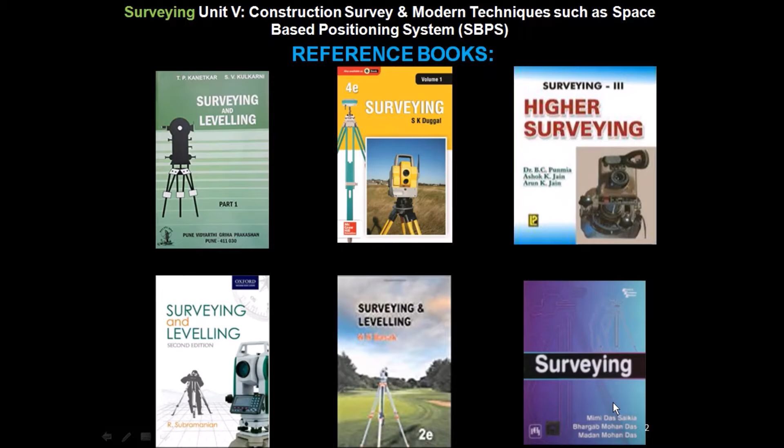Now we will see the course outcome. On successful completion of this course, the student will be able to define and explain basics of plane surveying and differentiate the instruments used for it.

Second course outcome: express proficiency in handling surveying equipment and analyze the surveying data from these equipment.

Third course outcome: describe different methods of surveying and find relative positions of points on the surface of the earth.

Fourth course outcome: execute curve setting for civil engineering projects such as roads, railways, etc.

Fifth course outcome: articulate advancements in surveying such as space-based positioning systems.

Sixth course outcome: differentiate map and aerial photographs, and also interpret aerial photographs.

Now we will see the course objectives. With successful completion of the course, the student should have the capability to describe the function of surveying in civil engineering construction. Second course objective: identify the sources of measurement errors and mistakes, and understand the difference between accuracy and precision as it relates to distance, differential leveling and angular measurements.

Third course objective: identify and calculate the errors in measurement and develop corrected values for differential level circuits, horizontal distances and angles for open or closed loop traverse.

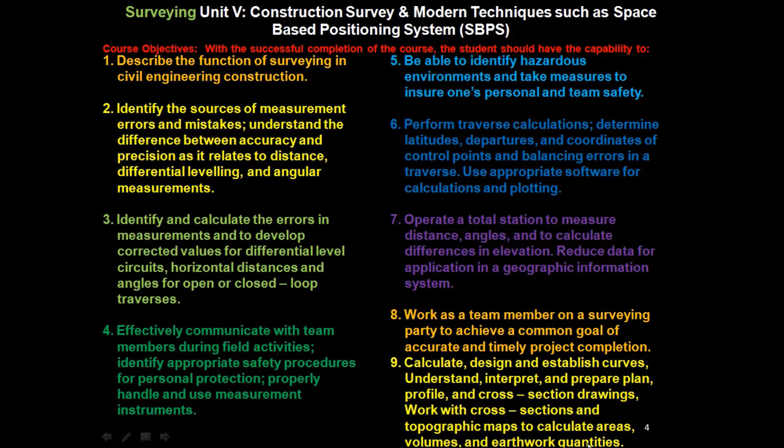Now we will see the syllabus of Unit 5. The title is Construction Survey and Modern Techniques such as Space-Based Positioning System, SBPS, which includes Part A: Introduction to Construction Survey, Establishing of Horizontal and Vertical Controls, Setting out of buildings, Maintaining verticality of tall buildings, Survey for open traverse.

Roadway, railway, drainage lines, water lines, canals, setting out of a bridge, determination of the length of the central line and the location of piers, setting out of a tunnel, surface setting out and transferring the alignment underground.

Part B includes introduction to SBPS, SBPS systems - GPS, GLONASS, Galileo, GAGAN, BeiDou and their features, segments of SBPS that is space, control and users, and applications of SBPS in surveying.

Now we will see Part A: Introduction to Construction Survey, Establishing of Horizontal and Vertical Controls, Setting out of Buildings, Maintaining Verticality of Tall Buildings, Survey for Open Traverse, Roadway, Railways, Drainage Line, Water Lines, Canals.

Setting out of a Bridge, Determination of the length of the central line and the location of piers, Setting out of a tunnel, surface setting out and transferring the alignment underground. Now we will see Part A, Introduction to Construction Survey.

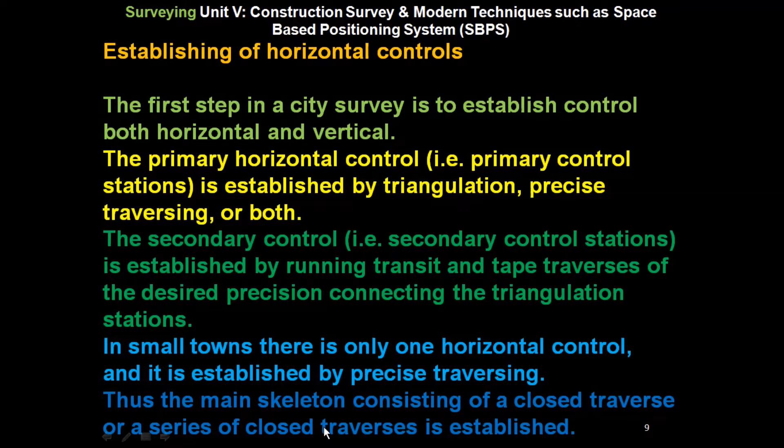Now we will see the establishing of horizontal controls. From the sides of these traverses, the details such as outlines of streets, gullies, buildings, etc. are located. In the triangulation for a city survey, the sides are necessarily shorter in length.

Objects such as church spires, flag poles, top of the hills, chimney, high buildings, water tank, etc. are generally used as triangulation stations in order to form well-shaped triangles and to avoid building high towers as far as possible, to reduce the cost of the survey.

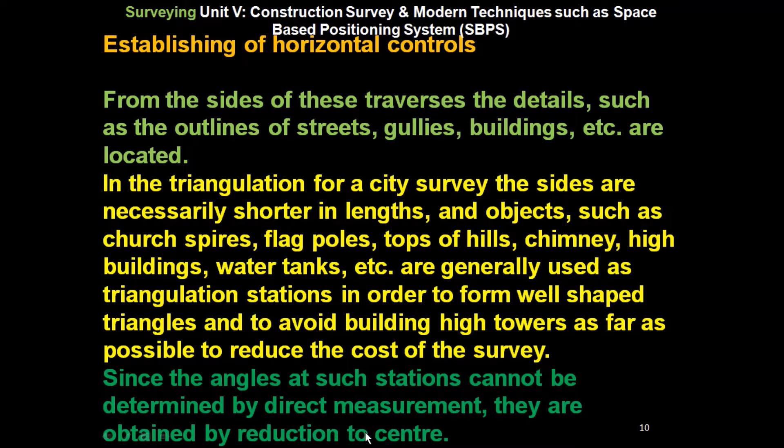Since the angles at such stations cannot be determined by direct measurement, they are obtained by reduction to center.

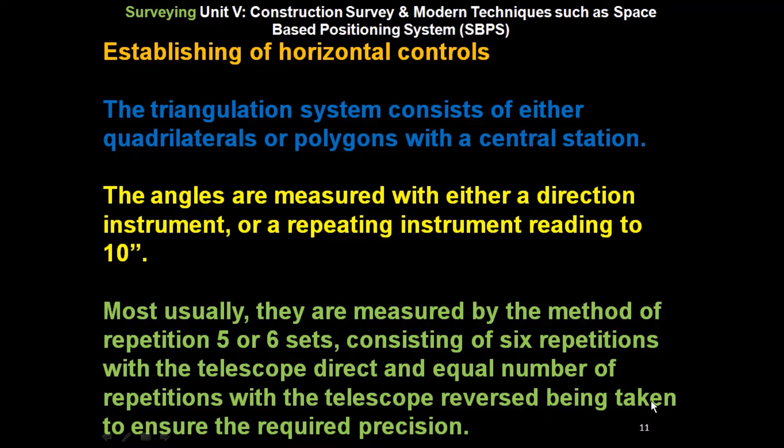The triangulation system consists of either quadrilaterals or polygons with a central station. The angles are measured with either a direction instrument or a repeating instrument reading to 10 seconds. Most usually they are measured by the method of repetition, 5 or 6 sets consisting of 6 repetitions with the telescope direct and an equal number of repetitions with the telescope reverse, to ensure the required precision.

Because of the shorter lengths of the sides of triangles, the signal should be exactly centered over the station marks. Astronomical observations for azimuths should be made at 2 or more stations.

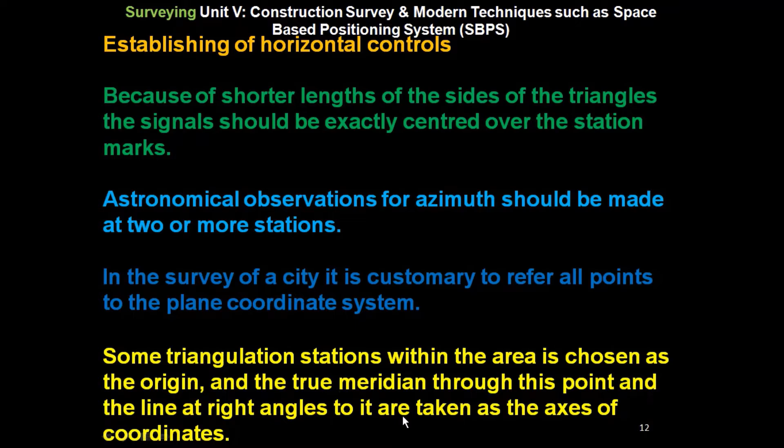In the survey of a city, it is customary to refer all points to a plane coordinate system. Some triangulation station within the area is chosen as the origin, and the true meridian through this point, and the line at right angles to it, are taken as the axes of coordinates. All reference points are plotted by means of plane rectangular coordinates with reference to these axes.

The azimuths of the initial line and some intermediate lines should be determined by astronomical observation. The advantage of the coordinate system is that in case a point of known coordinates is lost, it may be readily and precisely replaced by means of the coordinates of the other points.

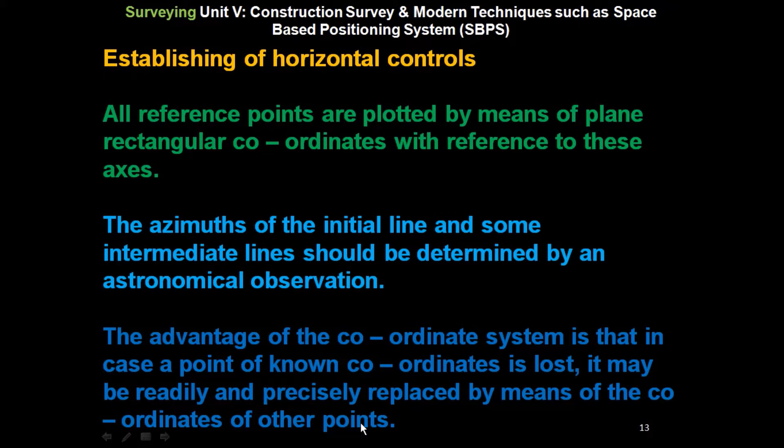The entire triangulation system is adjusted by the method of least squares. The precision required in triangulation is that the average error of closure of a triangle should not exceed 1.5 seconds, and the maximum one should not exceed 5 seconds.

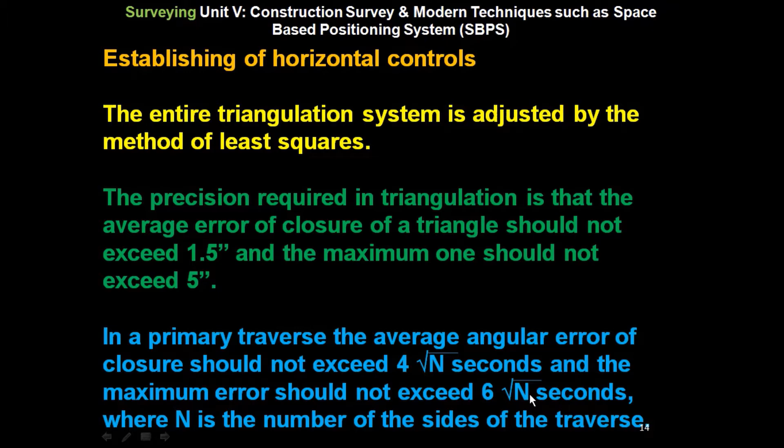In a primary traverse, the average angular error of closure should not exceed 4 under root n seconds, and the maximum error should not exceed 6 under root n seconds, where n is the number of sides of the traverse. In a secondary traverse, the corresponding figures are 10 under root n seconds and 15 under root n seconds.

The maximum error of closure in a primary traverse should not exceed 1 in 20,000 for large size city work. In a secondary traverse, it should not exceed 1 in 10,000 for medium size city work, while in a tertiary traverse it should not exceed 1 in 5,000 for small town work.

Now we will see the establishing of vertical controls. The next step is to establish vertical control. The purpose of vertical control is to establish benchmarks at convenient intervals all over the area.

The first order benchmarks are established by precise leveling at about half a kilometer or so apart, on permanent objects such as walls of buildings, abutments, piers, parapet walls of bridges, etc., by running levels in closed circuits, the permissible error of closure being 4 under root k millimeter, where k is the length of the closed circuit in kilometers.

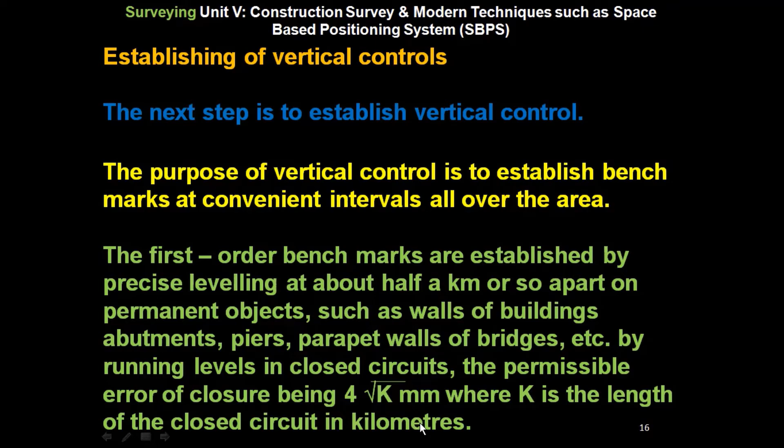The entire level net, consisting of several closed circuits, is adjusted by the method of least squares to determine the most probable values of the elevations of the benchmarks.

Additional benchmarks are established at traverse stations and also on permanent objects such as curb stones, gate pillars, fire hydrants, plinths and walls of buildings, etc.

This is done by running a line of second order levels beginning from any first order benchmark and closing on some other first order benchmark, or beginning from and ending on such a benchmark, the maximum closing error being 8 under root k millimeter, where k is the length of the line in kilometers.

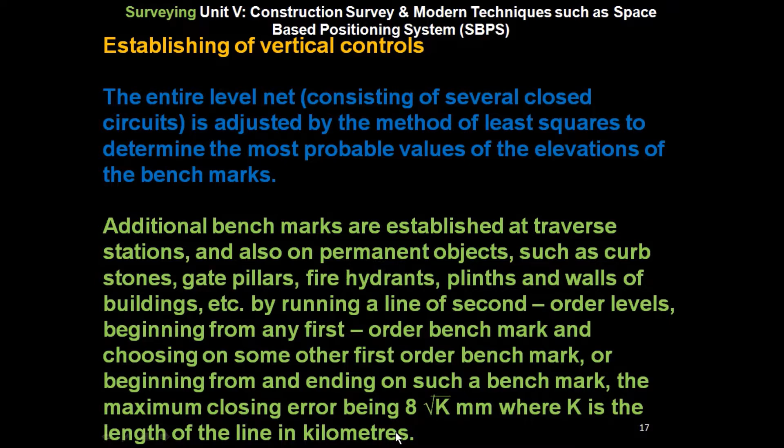So we have seen the establishing of horizontal and vertical controls. Now we will see the setting out of buildings.

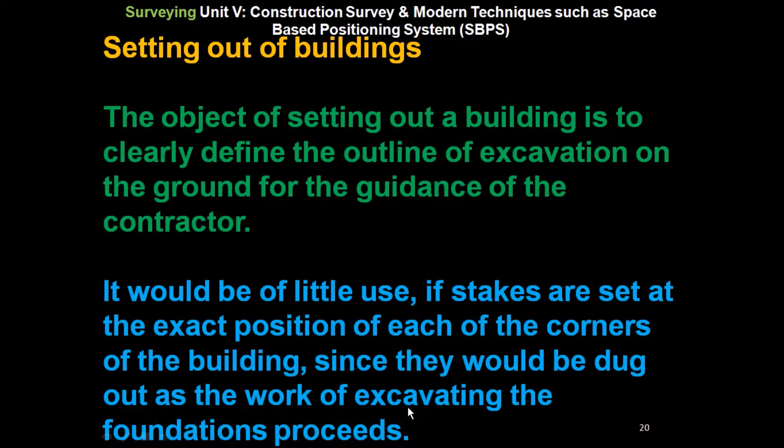The object of setting out a building is to clearly define the outline of excavation on the ground for the guidance of the contractor. It would be of little use if stakes are set at the exact position of each of the corners of the building, since they would be dug out as the work of excavating the foundations proceeds.

The best method is therefore to set out a reference rectangle outside the limits of excavation, say about 5 meters from the building line as shown in figure 1, so that the reference pegs A, B, C and D will not be disturbed during excavation, and then to locate each corner by means of coordinates with reference to the sides of this rectangle.

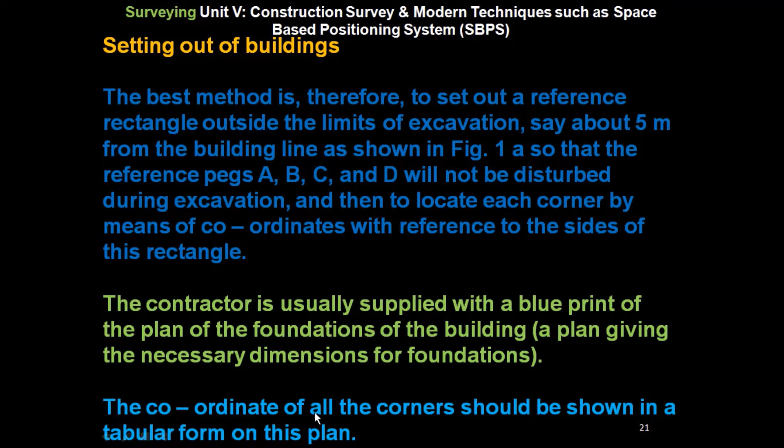The contractor is usually supplied with a blueprint of the plan of the foundations of the building, a plan giving the necessary dimensions for the foundations. The coordinates of all the corners should be shown in a tabular form on this plan.

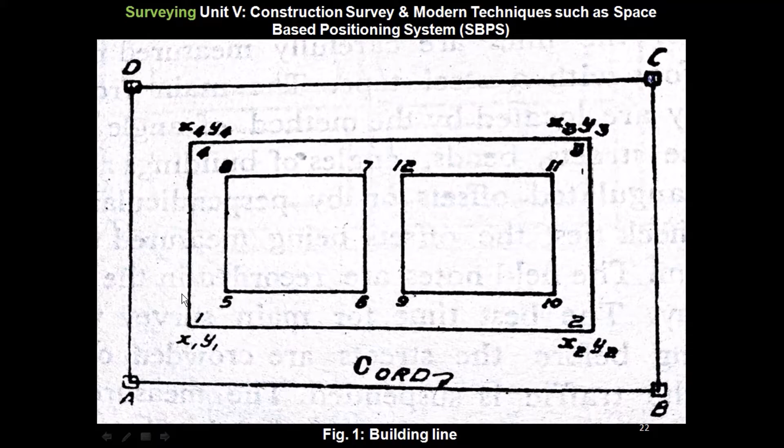So here we can see figure 1 showing the building line. So this is the building line.

The equipment required for the work consists of: first, a 30 meter steel tape; two 15 meter metallic tapes; third, the hammer; fourth, the plumb bob.

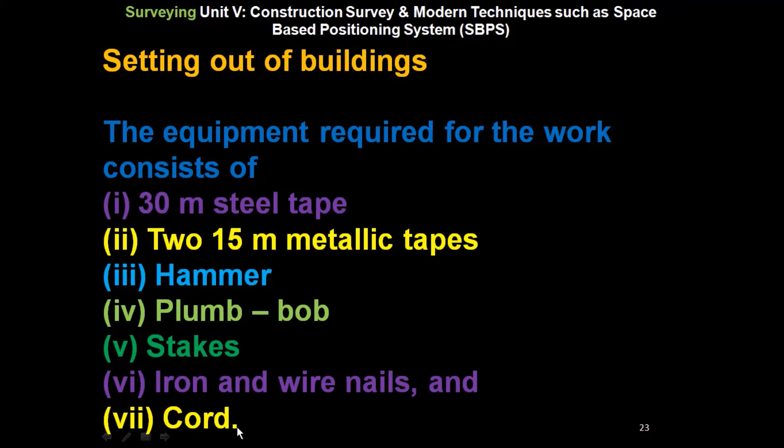Fifth is the stakes, sixth is the iron and wire nails, and seventh is the cord. So we will see the procedure for setting out a building.

Two stakes A and B are accurately driven at the required distance apart, say 14.5 meters. A cord is then stretched, the ends being secured to the wire nails driven in the center of the stakes. At A is set out a line perpendicular to AB, the right angle being set out with the tape.

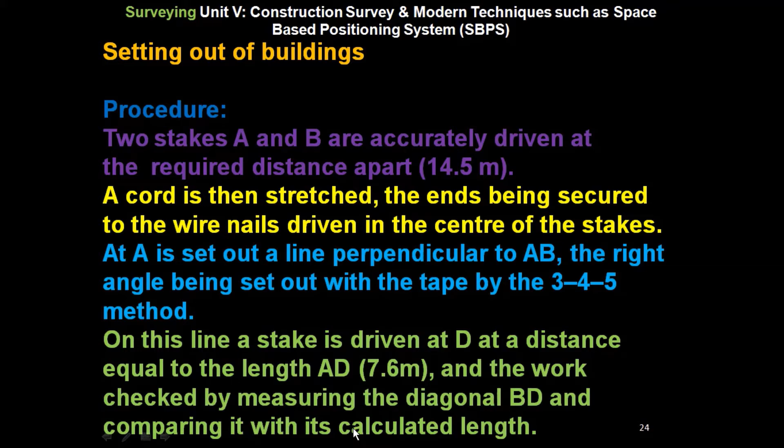By the 3-4-5 method, on this line a stake is driven at D at a distance equal to the length AD, say 7.6 meters, and the work is checked by measuring the diagonal BD and comparing it with its calculated length. The error, if any, should be corrected.

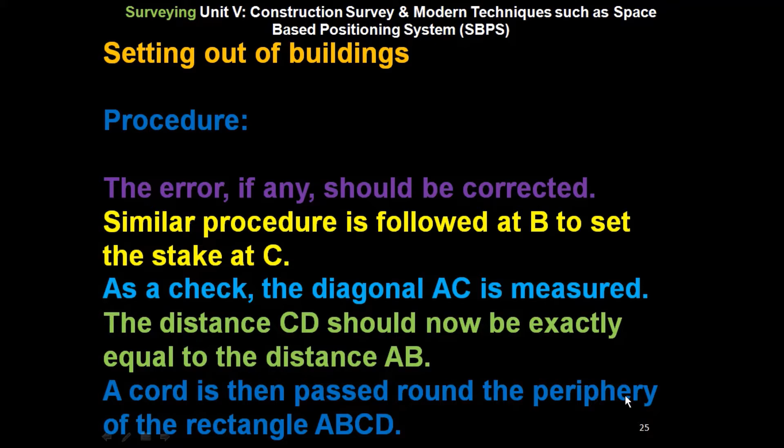A similar procedure is followed at B to set the stake at C. As a check, the diagonal AC is measured. The distance CD should now be exactly equal to the distance AB. A cord is then passed round the periphery of the rectangle ABCD.

Having set out the reference rectangle, each corner is fixed by measuring its coordinates from the sides of the reference rectangle. For example, corner 1 is fixed by measuring its coordinates x1 and y1 from AB and AD, and a stake is then driven in to mark its exact position.

When all the corners have been staked, a cord should be passed around the periphery of the figures 1, 2, 3, 4, 5, 6, 7, 8, etc., and the outline of the foundations marked with lime spread along these lines outside the cord. Now we will see the alternate method for setting out of a building.

In this method, instead of circumscribing a rectangle, the rectangle formed by the center lines of the outside walls of the building, as shown in figure 2, is set out accurately with the tape as a reference rectangle, and the corners are located by measuring their coordinates with reference to the sides of this rectangle.

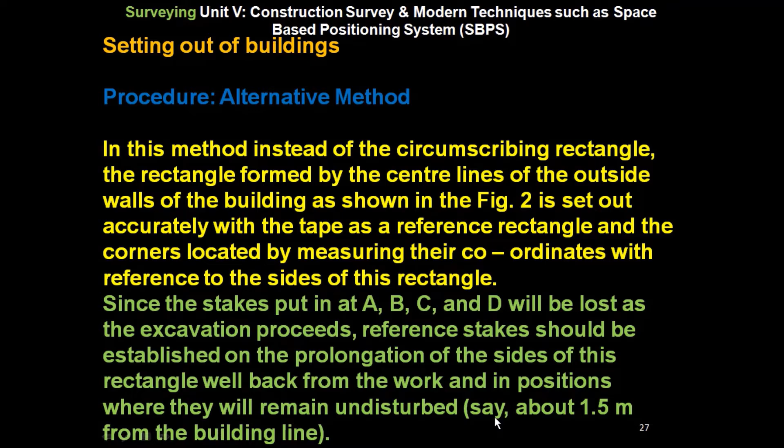Since the stakes put in at A, B, C and D will be lost as the excavation proceeds, reference stakes should be established on the prolongation of the sides of this rectangle, well back from the work and in positions where they will remain undisturbed, say about 1.5 meters from the building line. They should be protected by standing a drain pipe over each of them.

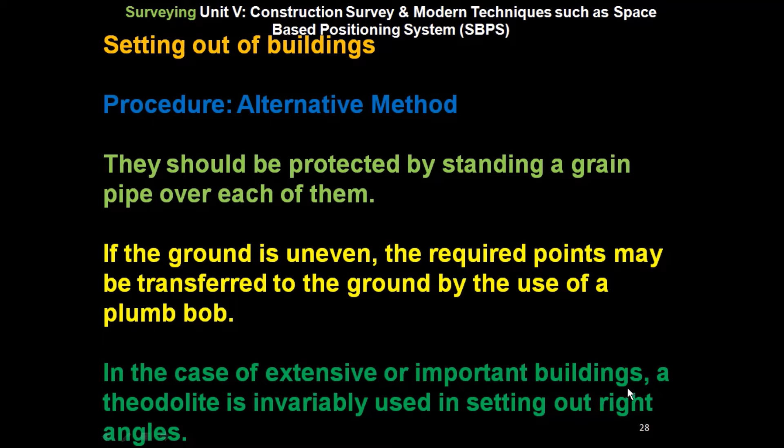If the ground is uneven, the required points may be transferred to the ground by the use of a plumb bob. In the case of extensive or important buildings, a theodolite is invariably used in setting out right angles.

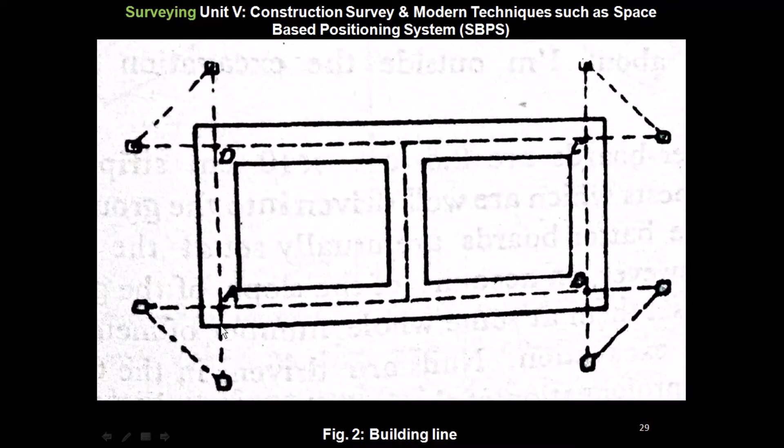So here we can see figure 2 showing the building line. So this is the building line.

Now we will see another method, the batter board method, for setting out of a building. In English practice, the batter board method is used. Temporary stakes are accurately set at all corners of the building, the entire work being checked by measuring the diagonals.

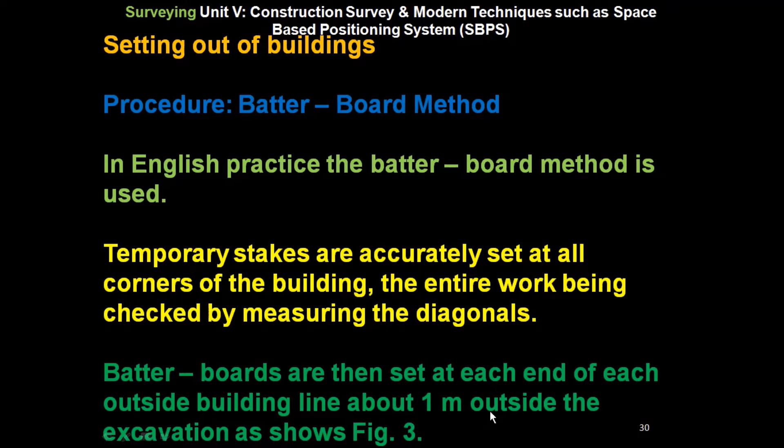The batter boards are 2.5 cm by 10 cm strips nailed to 5 cm by 10 cm posts which are well driven into the ground. The top edges of all the batter boards are usually set at the same level.

Sometimes, however, on account of the slope of the ground, it is convenient to set them at some whole number of meters above the bottom of the excavation.

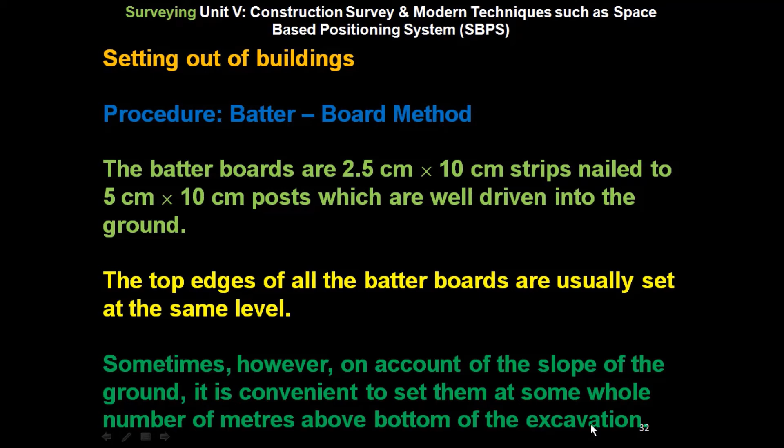Nails are driven into the top of these boards on the prolongation of the building lines, which are given by the theodolite. The building lines are defined by stretching a cord or wire between the nails in opposite batter boards.

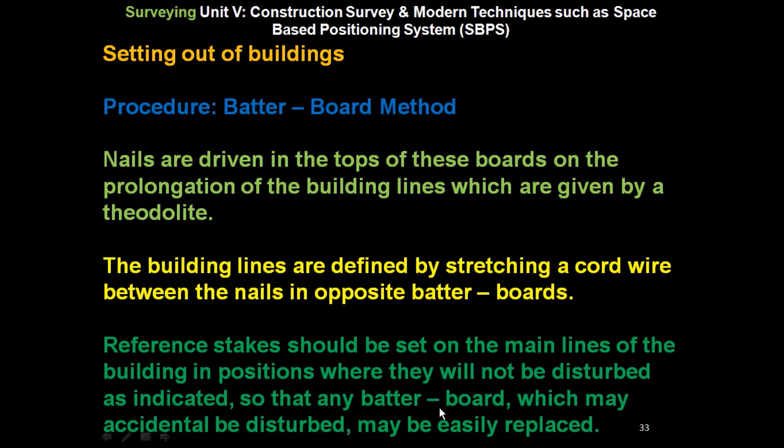Reference stakes should be set on the main line of the building in positions where they will not be disturbed, as indicated, so that any batter board which may accidentally be disturbed may be easily replaced.

Benchmarks should be established in convenient positions around the site of the work. They should be well away from the site so that they may remain undisturbed until the work is completed.

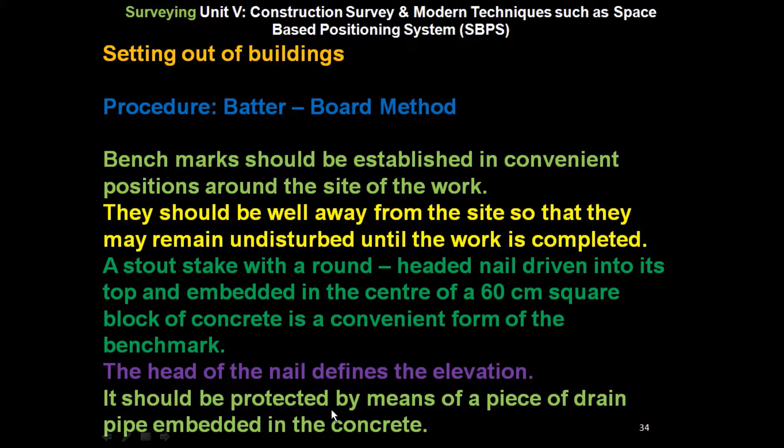A stout stake with a round-headed nail driven into its top and embedded in the center of a 60 cm square block of concrete is a convenient form of benchmark. The head of the nail defines the elevation. It should be protected by means of a piece of drain pipe embedded in the concrete.

So we have seen the setting out of buildings. Now we will see the maintaining of verticality of tall buildings. So, maintaining verticality of tall buildings.

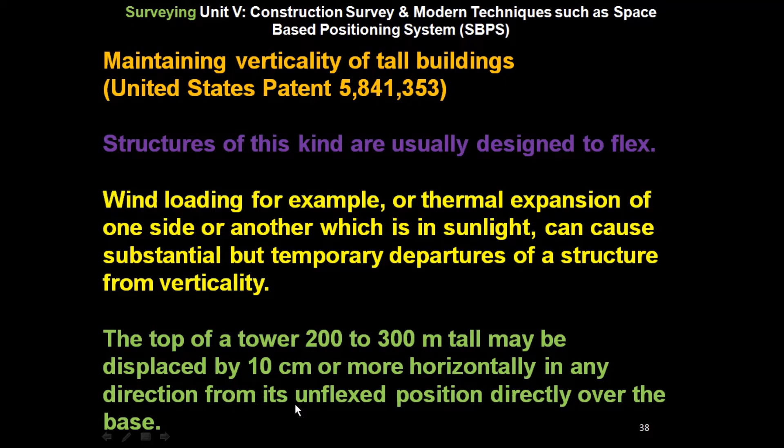The top of the tower, 200 meters to 300 meters tall, may be displaced by 10 centimeters or more horizontally in any direction from its unflexed position directly over the base.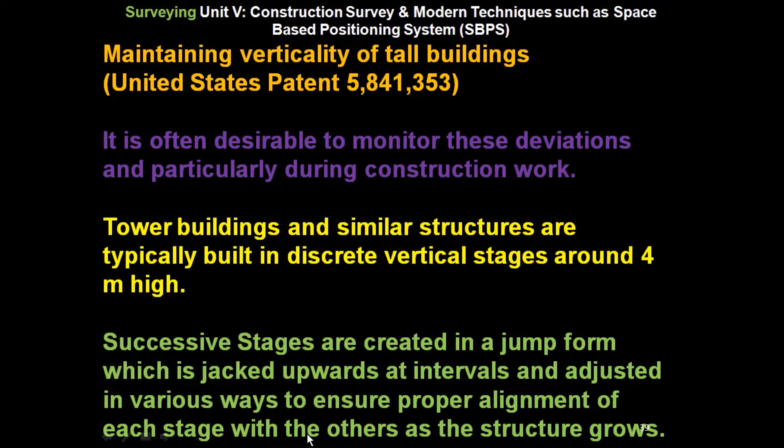It is often desirable to monitor these deviations, particularly during construction work. Tower buildings and similar structures are typically built in discrete vertical stages around 4 meters high. Successive stages are created in a jump form which is jacked upwards at intervals and adjusted in various ways to

ensure proper alignment of each stage with the others as the structure grows. The jump form contains formwork or shuttering into which concrete is poured when a new stage is created, and which must be set up in line with concrete already poured in the previous stage. The formwork must often be fixed in place at an appreciable angle from vertical, depending on the current state of flex or tilt in the existing structure.

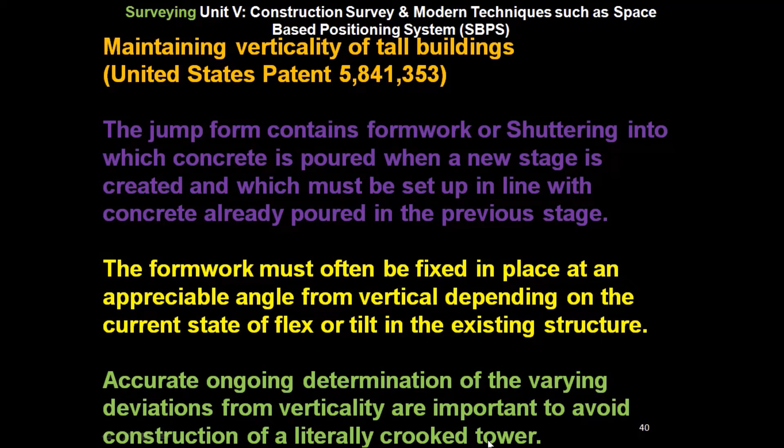Accurate ongoing determination of the varying deviations from verticality is important to avoid construction of a literally crooked tower. The proper functioning of some services to be installed within the tower walls, and in some cases structural strength of the tower itself, may otherwise be adversely affected.

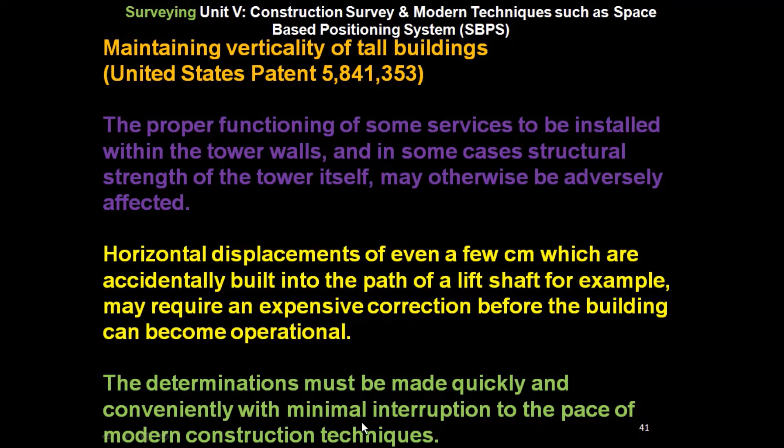Horizontal displacement of even a few centimeters which is accidentally built into the path of a lift shaft, for example, may require an expensive correction before the building can become operational. The determinations must be made quickly and conveniently with minimal interruptions to the pace of modern construction techniques.

Traditional methods of monitoring the verticality of a building under construction involve use of a zenith optical plummet or an optical theodolite. Both of these devices require trained personnel to carry out measurements under appropriate conditions and have an accuracy which decreases with height of the building.

At least one surveyor must visit the building site each time the structure of a new level is being laid out, and the conditions may not be particularly suitable for a measurement at that time. These methods are therefore not regarded as being particularly convenient or accurate for use in the construction of tall towers.

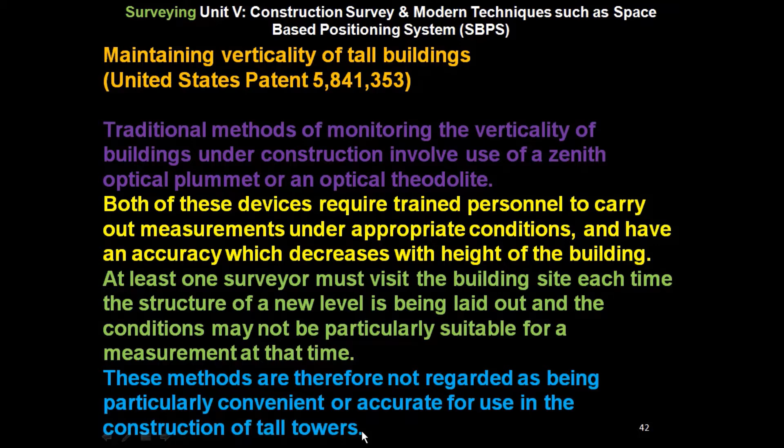In the first method, the zenith optical plummet is located at ground level over a fixed mark and a laser beam is directed upward to a bull's eye at the new level. Locating the deviations of the beam on the bull's eye indicates whether the building is rising sufficiently close to vertical.

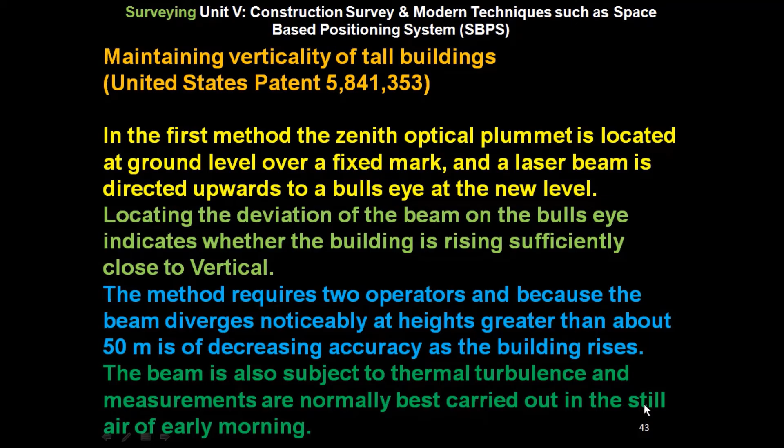The method requires two operators, and because the beam diverges noticeably at heights greater than about 50 meters, it is of decreasing accuracy as the building rises. The beam is also subjected to thermal turbulence, and measurements are normally best carried out in the still air of early morning. In the second traditional method, the theodolite is located some distance from the structure and a telescope sighting is made of the ground level mark and then the bull's eye.

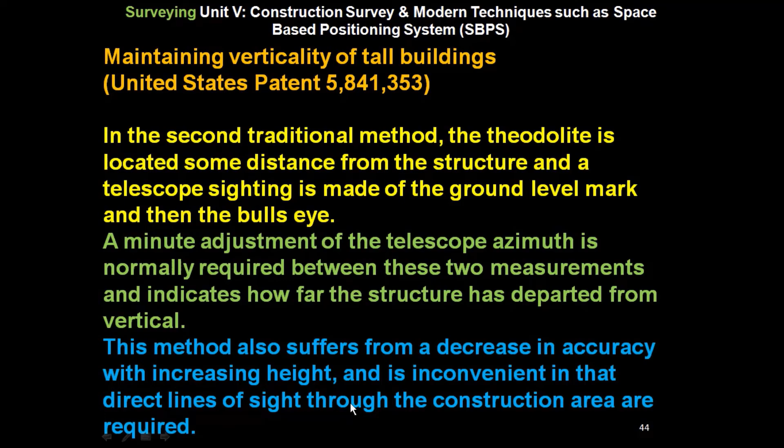A minute adjustment of the telescope azimuth is normally required between these two measurements and indicates how far the structure has departed from vertical. This method also suffers from a decrease in accuracy with increasing height and is inconvenient in that direct lines of sight through the construction areas are required.

The modern methods of surveying are able to make use of a remote positioning system, which may be satellite or land based. The satellite system most commonly used today is the Global Positioning System, GPS, although others such as Global Orbiting Navigation Systems, GLONASS, are also in use or under development. Some land-based systems which effectively simulate the satellite-based systems for a small area are also under development.

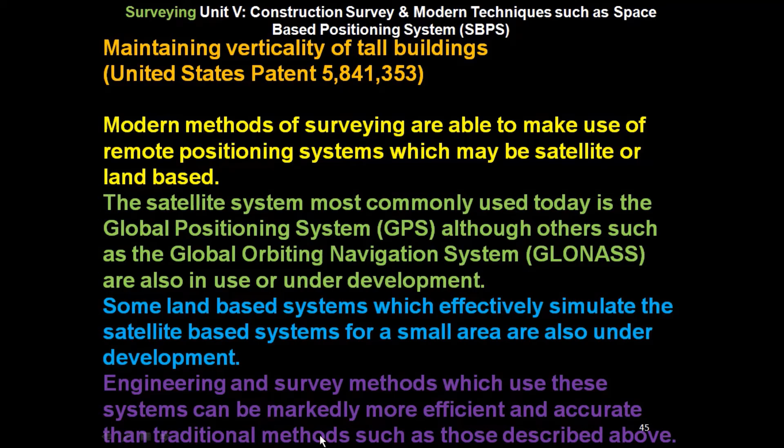Engineering and survey methods which use these systems can be markedly more efficient and accurate than traditional methods such as those described above.

Use of GPS in surveying typically involves a single operator who sets up a base antenna or receiver over the control point having a known position, and moves about with the mobile antenna or receiver, sometimes called a GPS total station. The operator places the antenna over unknown survey points in the field to record their positions using signals transmitted by a minimum number of satellites which are above the horizon.

A vector or baseline is determined from the base site to the mobile unit. Survey points whose positions are measured in this fashion may in turn become control points from which measurements of other unknown points may be taken.

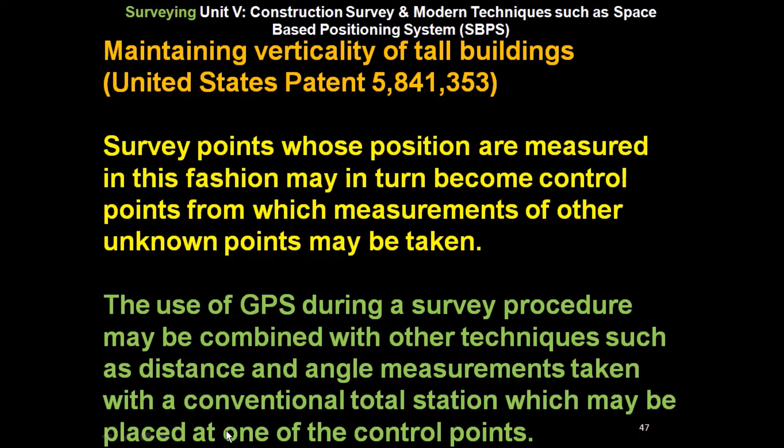The use of GPS during a survey procedure may be combined with other techniques such as distance and angle measurements taken with a conventional total station, which may be placed at one of the control points.

Each GPS satellite transmits two coded L-band carrier signals which enable some compensation for propagation delays through the ionosphere. Each receiver contains an almanac of data on the satellite orbits and uses ephemeris corrections transmitted by the satellites themselves.

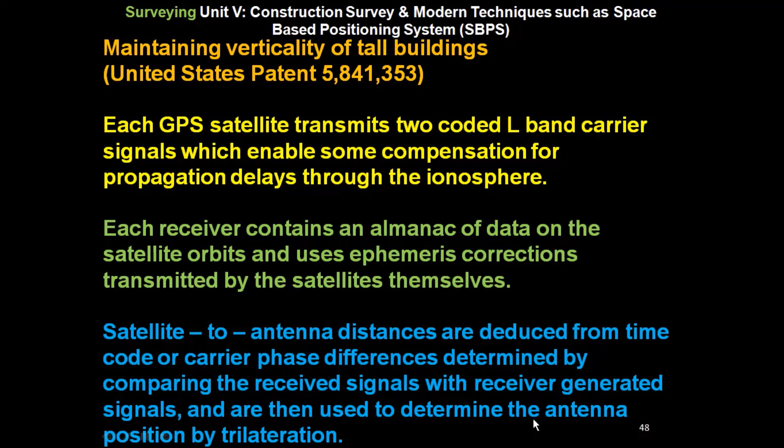Satellite to antenna distances are deduced from time code or carrier phase difference determined by comparing the received signals with receiver-generated signals, and are then used to determine the antenna position by trilateration.

Only those satellites which are sufficiently above the horizon can contribute to a position measurement, the accuracy of which depends on various factors including their geometrical arrangement at the time when the distances are determined. Distances measured from an antenna to four or more satellites enable the antenna position to be calculated with reference to the global ellipsoid WGS84.

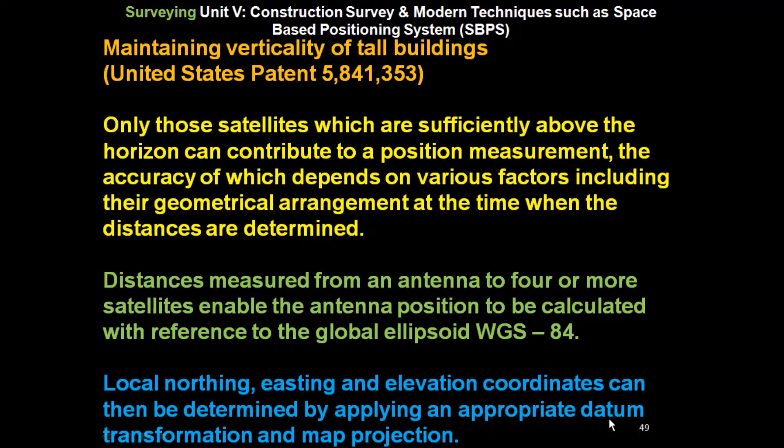Local northing, easting, and elevation coordinates can then be determined by applying an appropriate datum transformation and map projection. By using carrier phase differences in any one of several known base mobile receiver techniques, the mobile antenna coordinate can be determined to an accuracy in the order of 1 centimeter.

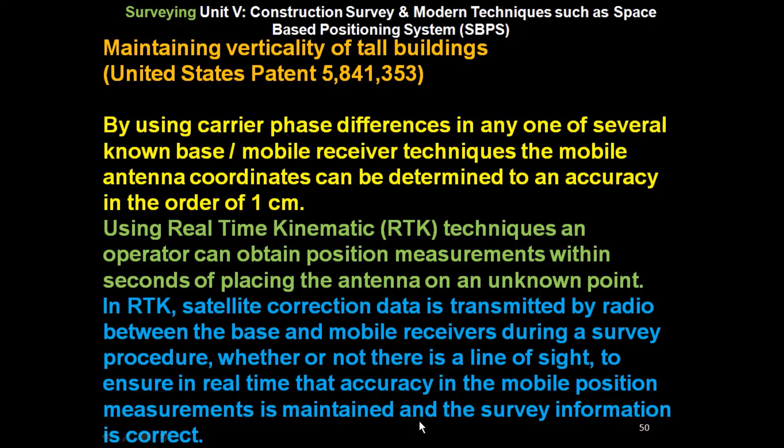Using real-time kinematic (RTK) techniques, an operator can obtain position measurements within seconds of placing the antenna on an unknown point. In RTK, satellite correction data is transmitted by radio between the base and the mobile receivers during a survey procedure, whether or not there is a line of sight, to ensure in real time that accuracy in the mobile position measurements is maintained and the survey information is correct.

Determination of verticality of various structures such as high-rise buildings and towers is enabled through various methods involving use of a series of tilt-meter devices, a remote positioning system, or a combination of both. These methods are particularly useful in monitoring deviations from vertical during construction work and adjusting a jump form.

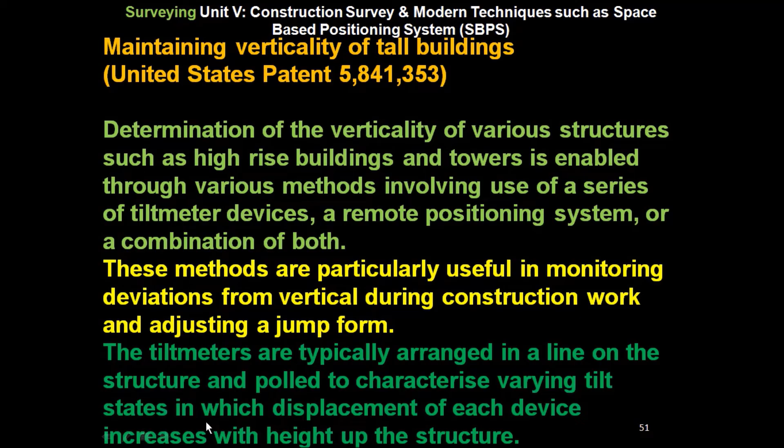The tilt meters are typically arranged in a line on a structure and polled to characterize varying tilt states in which displacement of each device increases with height up the structure. The remote positioning measurements are typically made in real time using a satellite-based system such as GPS, the Global Positioning System.

Departures of a survey point on the jump form from a vertical target line may be used to monitor verticality during the construction process. These methods may be combined with tilt-meter measurements being used to monitor growth of a tower structure and calculate an expected position of the jump form at any stage of construction, and GPS measurements being used to monitor the actual position.

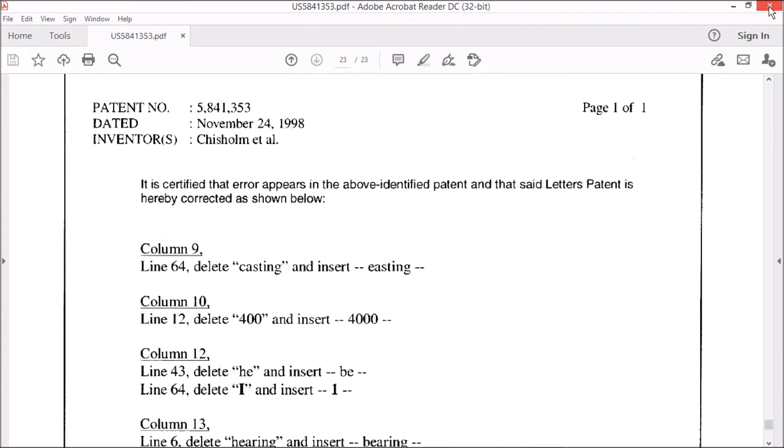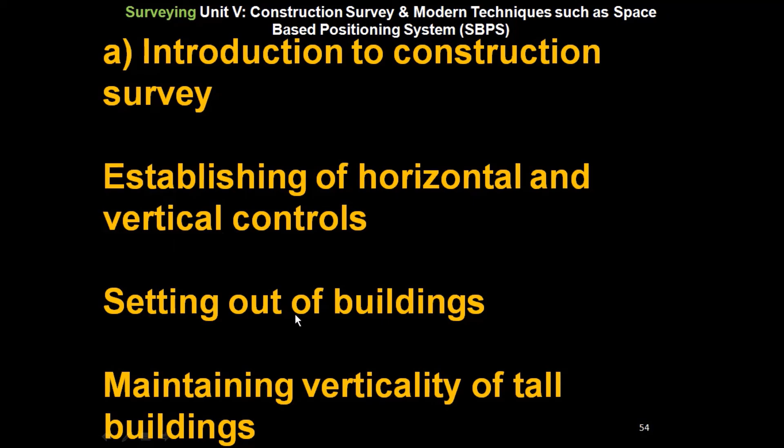So we have seen maintaining verticality of tall buildings. We have seen part A, Introduction to Construction Survey: establishing of horizontal and vertical controls, setting out of buildings, maintaining verticality of tall buildings, survey for open traverse, roadway, railway, drainage line, water lines, canals, setting out of a bridge, determination of the length of the central line and the location of piers, setting out of tunnel, surface setting out and transferring the alignment underground.

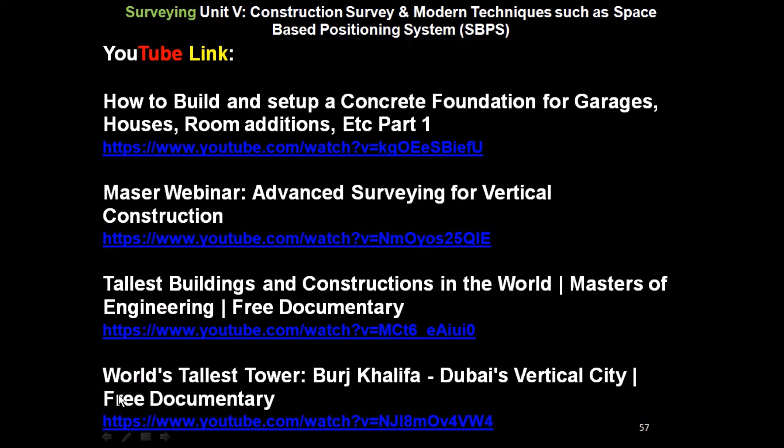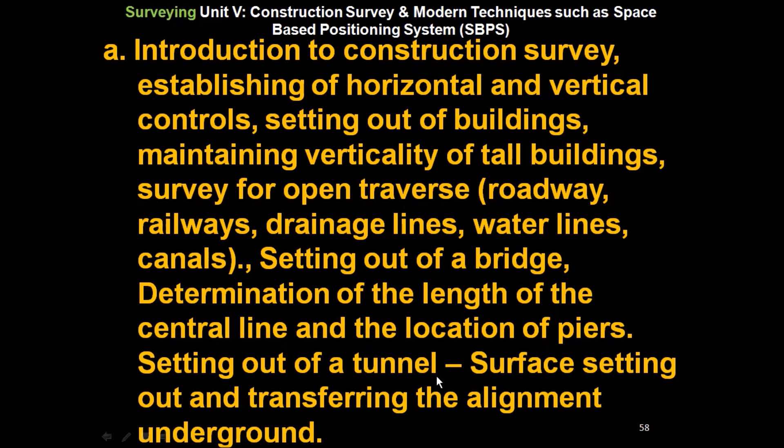So we have seen part A, Introduction to Construction Survey: establishing of horizontal and vertical controls, setting out of buildings, maintaining verticality of tall buildings, survey for open traverse, roads, railways, drainage line, water lines, canals, setting out of a bridge, determination of the length of the central line and the location of piers, setting out of tunnel, surface setting out and transferring the alignment underground. This is the syllabus for unit number 5, titled Construction Survey and Modern Techniques such as Space-Based Positioning System (SBPS).

It also includes part B, which includes introduction to SBPS, SBPS system, GPS, GLONASS, Galileo, Gagan, Beidou and their features, segments of SBPS - space, control and user, and application of SBPS in surveying.